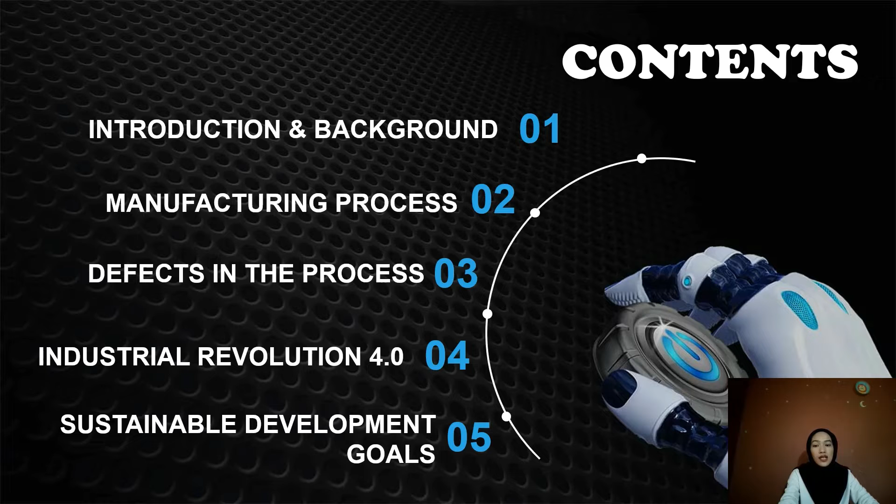This is the contents that we will going to present. As the presenter one, I will present the introduction and background of a famous manufacturing company.

It was the largest automobile manufacturer in the world for the first time in 2008, which is Toyota Motor Corporation. Originally, the company was founded by Sakichi Toyoda in 1926. Then the Toyota Motor Corporation was founded in August 1937 by Kiichiro Toyoda, the eldest son of Sakichi Toyoda. It becomes one of the largest automobile manufacturers in the industries, and now both companies are part of the Toyota Group.

I will share a little bit of history of Toyota Industries. It started in 1926 as Toyota Automatic Loom Works, founded by Sakichi Toyoda. He was the inventor of a series of manual and machine-powered looms, and was referred to as king of Japanese inventors due to his contributions to the industry.

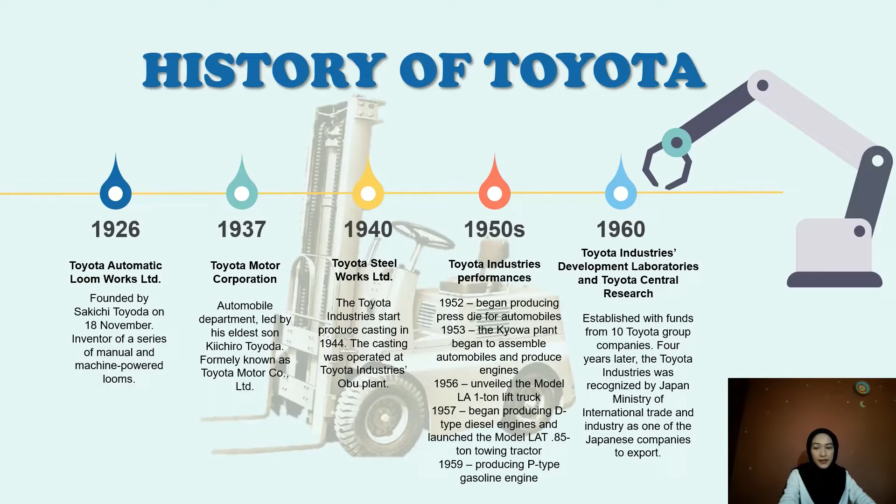In 1937, Kiichiro Toyoda decided to change focus from loom manufacturer into the automobile manufacturing. It is when the Toyota Motor Corporation was created. It was formerly known as Toyota Motor Co. Limited. Along the years, the manufacturing company has developed to many subsidiaries.

The company now produces more than 10 million vehicles per year. The headquarters of the manufacturing company is located at Toyota City in North Central Aichi Prefecture, Japan. Several of Toyota Motor Corporation manufacturing plants are located there too.

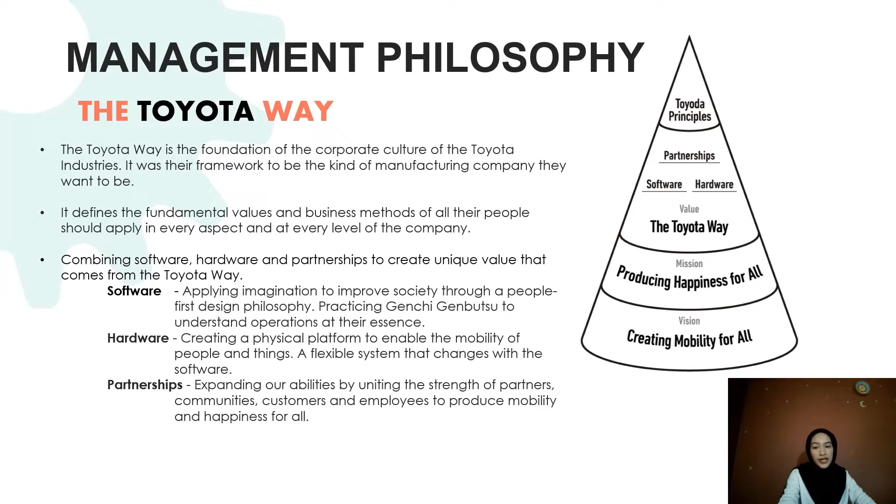The Toyota Industries has a management philosophy which is the Toyota Way. The Toyota Way is the foundation of the company to be the kind of company they want to be. It defines the fundamental values and business methods of all their people, including employers and workers, should apply in every aspect at every level of the company. The Toyota Way combines software, hardware, and partnerships.

So the Toyota industry used the lean manufacturing methods called the Toyota Production System. It is the holistic approach to efficiency, generating sustainable profits and satisfying the customer with the highest possible quality at the lowest cost in the shortest lead time.

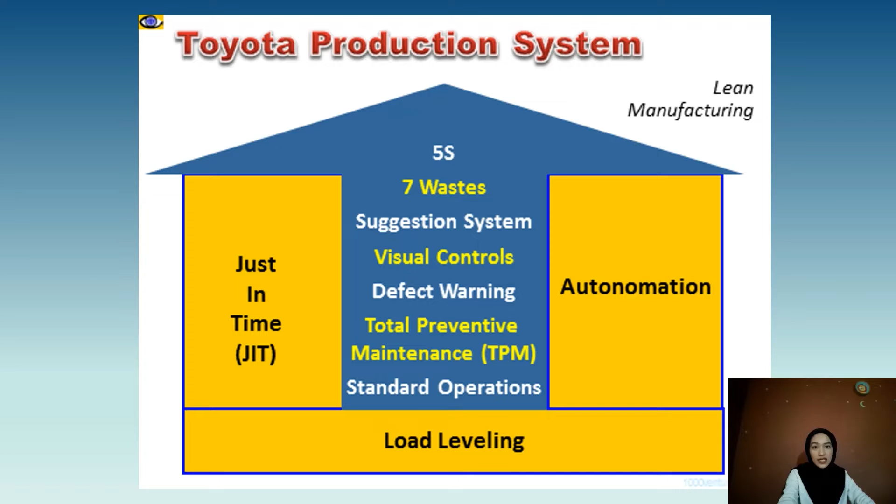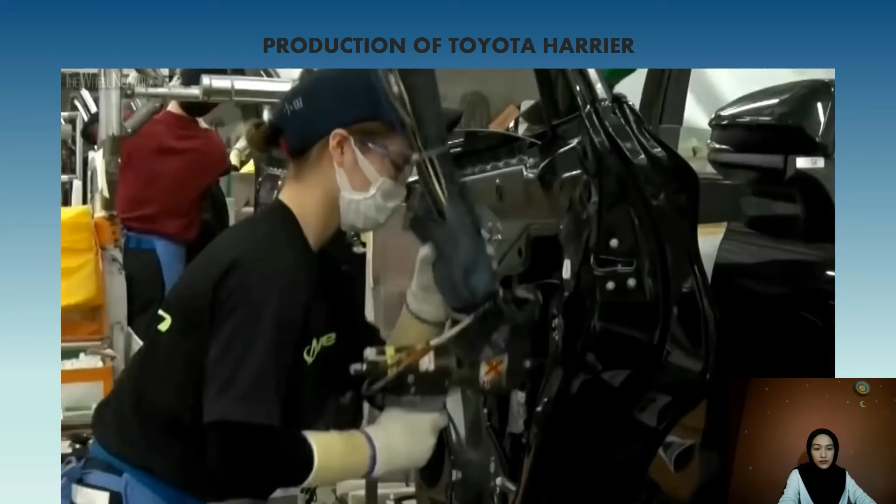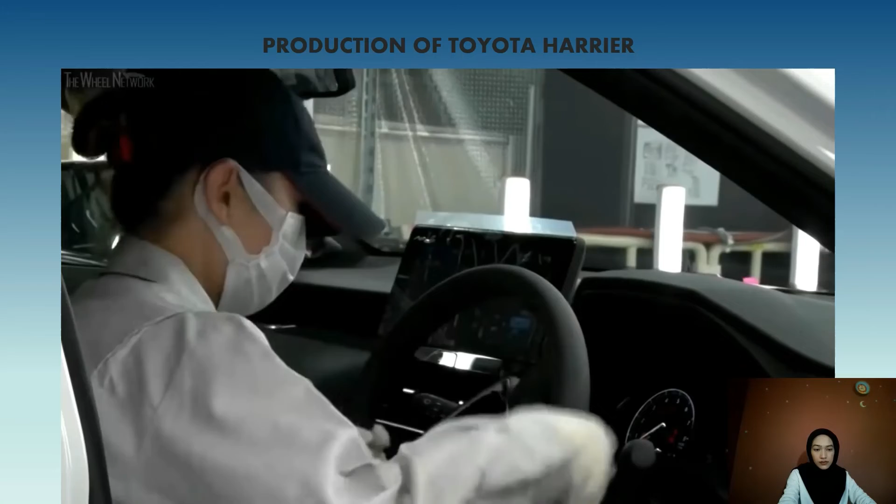So that's all from me. The next presenter will present the manufacturing process and technology applied in Toyota Industries.

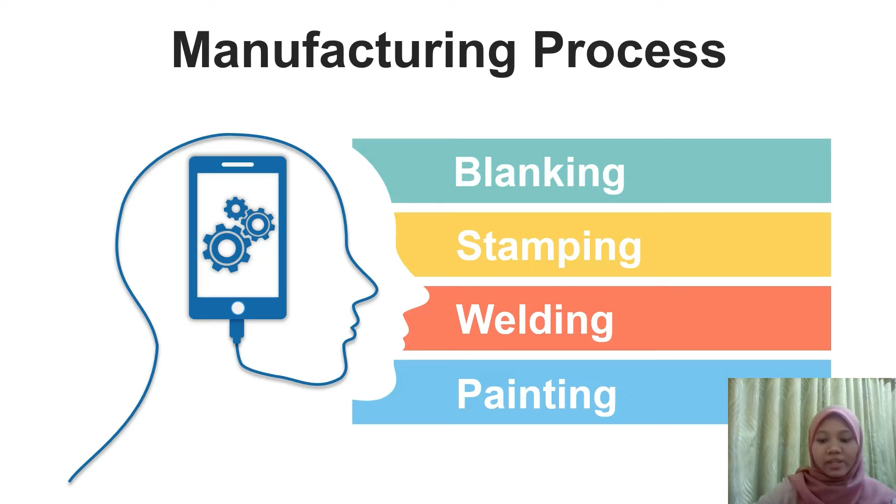In producing a car, Toyota has 8 major steps starting from blanking, stamping, welding, painting, injection molding, assembly, final inspection, and shipping. Therefore, let us analyze the process deeper.

The first step is blanking. Blanking is a process of cutting sheet metal into specific dimension and shape. The coil will be loaded into the blanking machine to be straightened and cleaned. The sheet metal then will be cut according to its dimension.

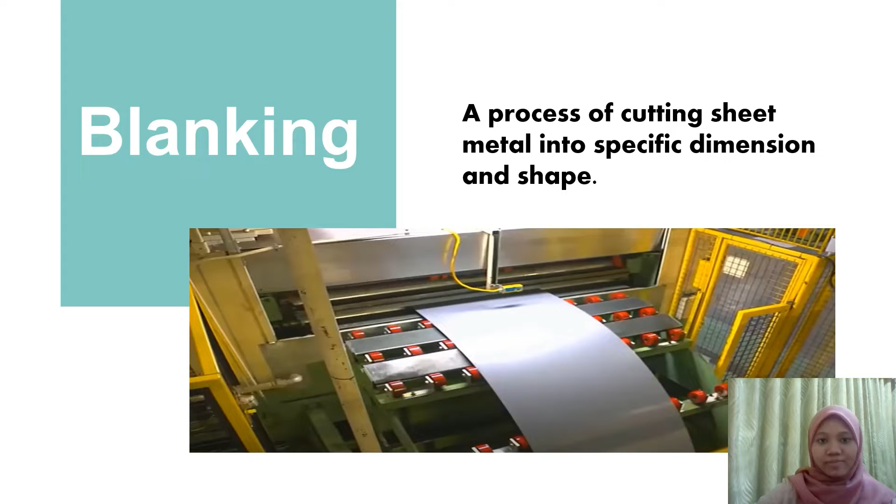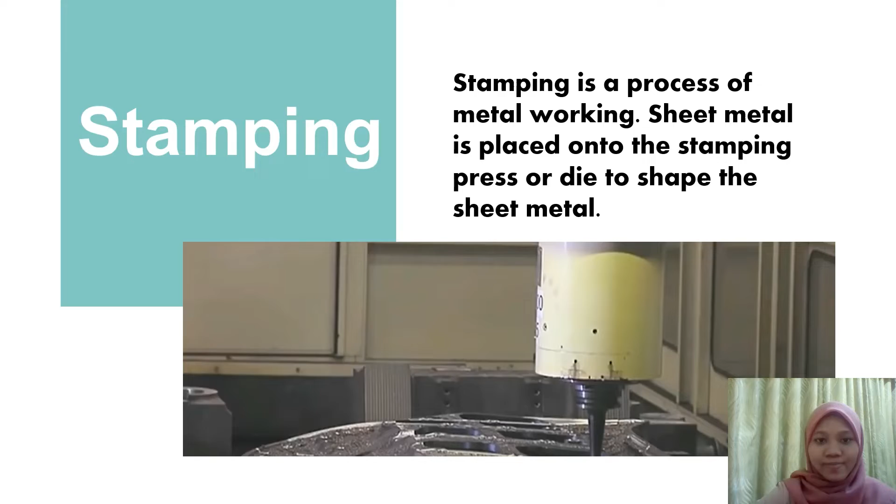After the sheet metal being stamped to desired shape, we will move to the third process, which is welding process. In welding process, the sheet metals of different parts will be joined using resistance spot welding. This welding process is conducted by automated robots as believed to be more precise and time-saving. This type of welding is suitable for assembling car body as the process is very fast and efficient for huge car production.

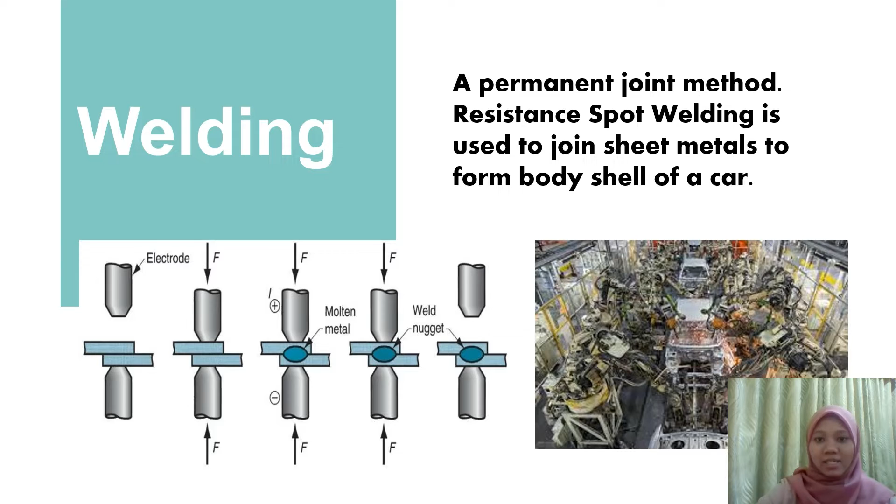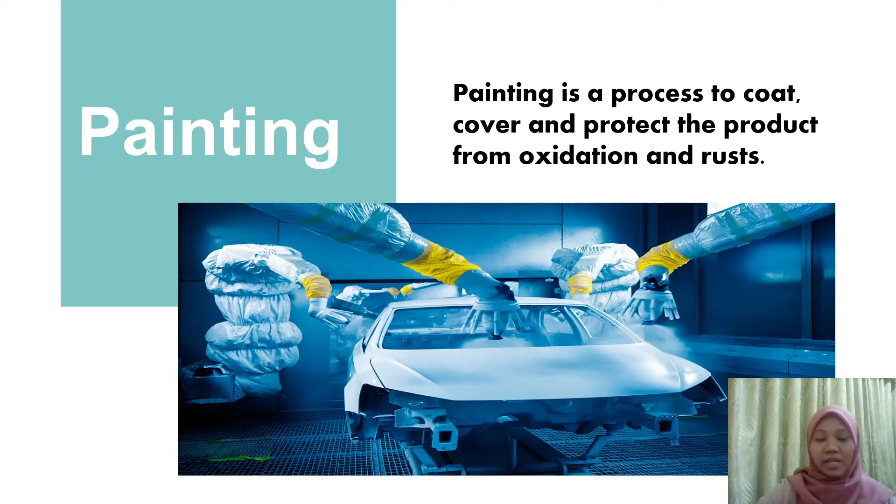The fourth step is very crucial, which is painting, as paint will not just coat and cover the car body with attractive colors to increase its aesthetic value, it also helps in protecting the car body from rust and oxidation. Toyota car painting process took 8 major steps, start from cleaning, baking, and coating in every precise manner.

The next process is injection molding. Injection molding is a process of injection of melted plastic pellets into a mold cavity which fills and solidifies to produce final product. Injection molding is needed to fabricate non-metal components of the car body, which are interior trim, rocker panels, front and rear bumpers, substrate, and also instrument panel. Injection molding is the most suitable technique to fabricate these parts, as it is possible to make complex and intricate shape. This process also economical for large production company like Toyota.

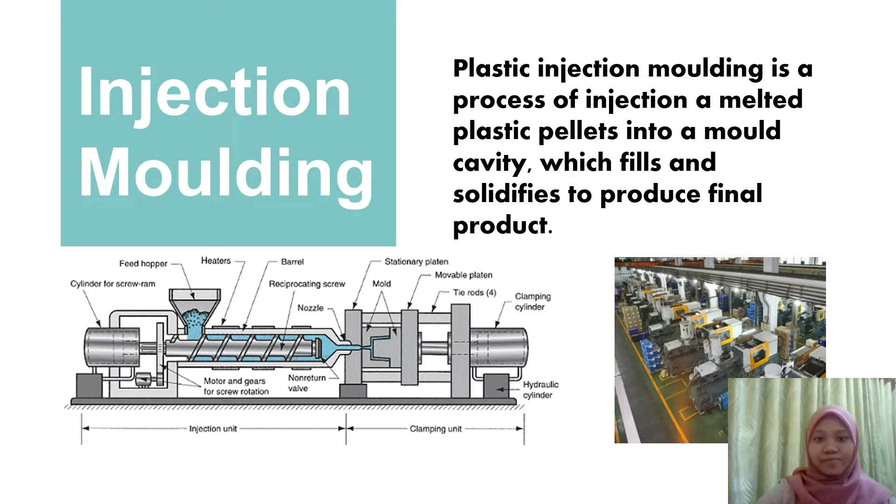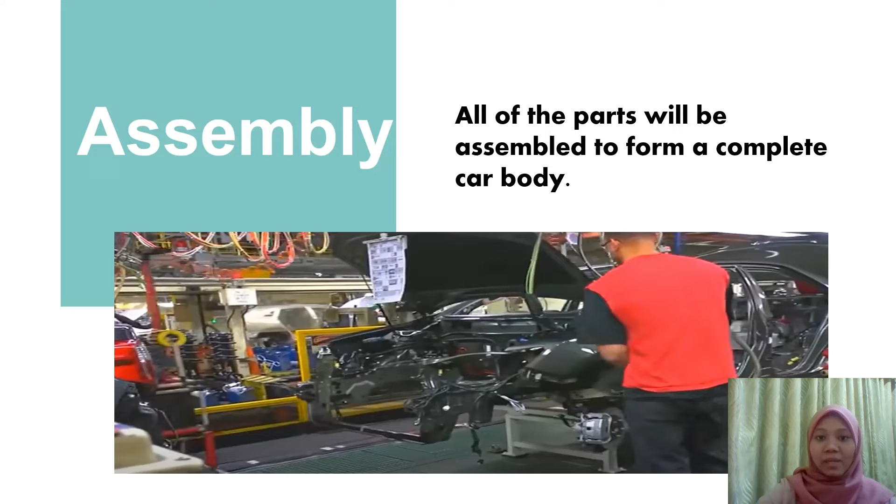After all parts are ready, all the interior and outer components will be assembled using bolts and nuts. The assembly process is made easier for the worker as the hoist will be used to hold and transfer the parts in assembly process. Some of the parts were assembled using ultrasonic welding instead of temporary joint.

As the car has completely assembled, final inspection will be done by inspectors to ensure the car can operate at its best condition before the car arrives at customer's hand.

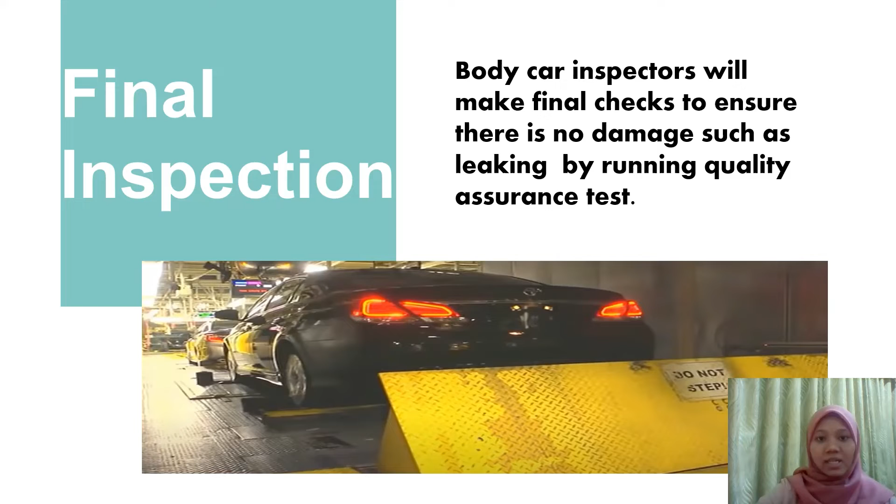The last process is shipping process. As inspectors had done with inspection, the cars will be transferred to Toyota dealers in order to provide customers with the high-quality automobile craftsmanship.

The second part of this presentation is technology applied in Toyota industry. Throughout this process, computer laser technology and automated robots are utilized to fabricate high-quality cars.

Two major principles, Poka-yoke and Jidoka, were applied to ensure all problems encountered during the fabrication process are addressed by stopping the manufacturing process once a problem arises. A cord is used by the workers to notify the leaders that there is a problem on specific parts of the production line. By the end of this presentation, we can see that Toyota utilized high-quality technologies to create the best craftsmanship in the automotive industry.

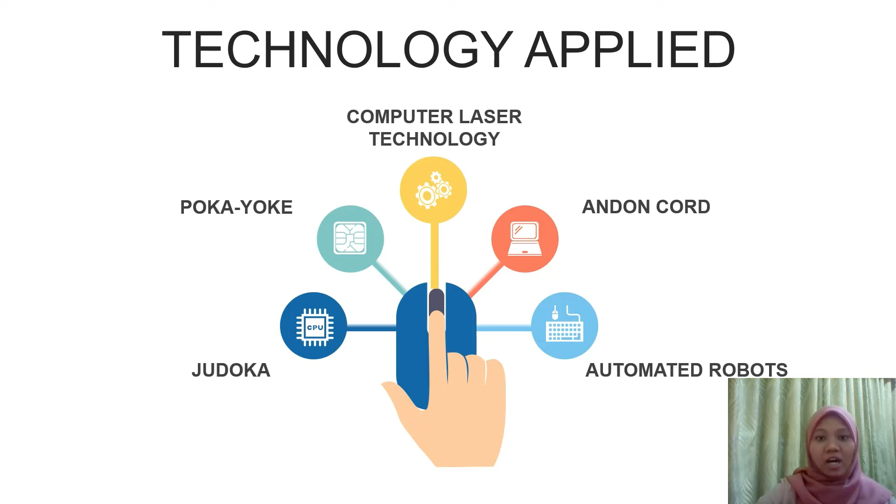That's all from me. Thank you.

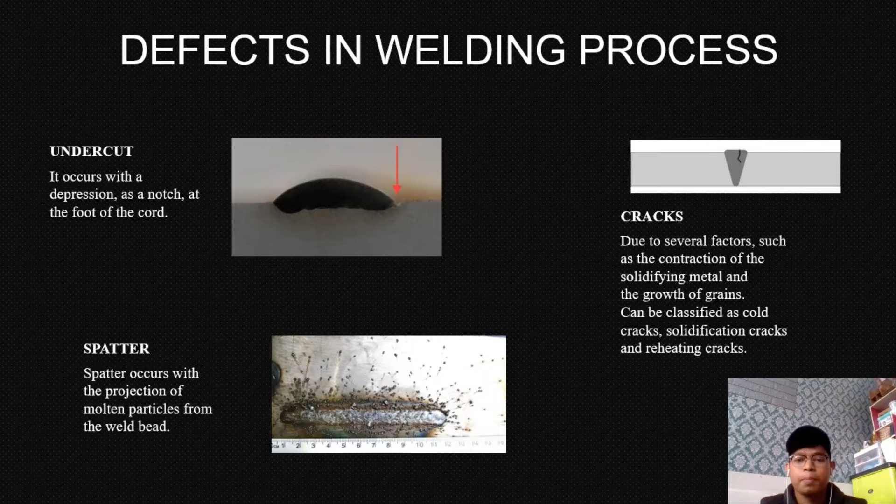For the defect in the injection molding process, we can see the vacuum void, an air pocket trapped in the injection molding product below the closed surface, as shown in the figure above.

The second defect is weld lines. Weld lines occur when two different flows meet each other during the injection molding process, giving a line that looks like an incomplete molding process.

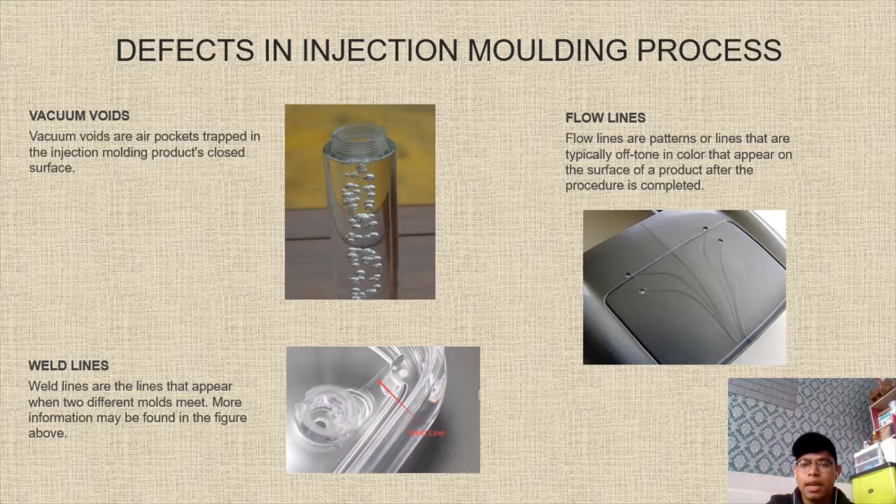The next defect is flow lines. Flow lines are patterns or lines, typically off-tone in color, that appear on the surface of the product after the procedure is complete. This gives lines on the product that make it look cheap.

The defects in the painting process are four: grinning, chalking, running, and sagging. Grinning is the visibility of the background due to insufficient opacity of the paint film even after the final coat, so we can see the original color of the body even after finishing the painting process.

The next is chalking, which is the formation of powder on the painted surface. When we touch the surface after finishing the painting process, we can see powder on our hand from that surface.

The next is running, which means a thin layer of paint moves downward on the smooth surface. At the end, we can see a small area of paint assembled at the lower part.

The next is sagging. Sagging is similar to running, but the difference is that in sagging, a thick layer of paint film runs downward, so it's similar to running.

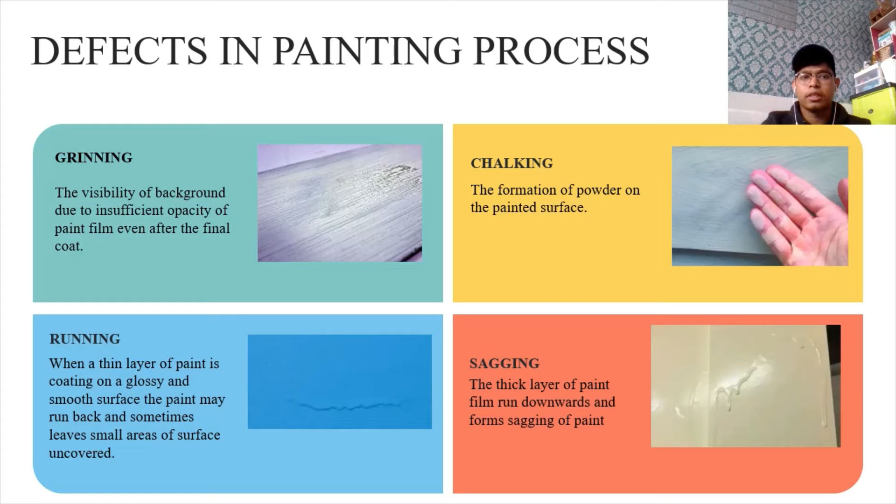For the quality issue in this process, after some research, I found that most Toyota users complain about their dashboard melting. This happens when they park their car outside, and during hot weather, the sun directly hits the dashboard and makes it melt.

Other than that, I found they complain that their car body fades after several times of use, even during rainy days or hot weather. After using the car for some time, the paint on the body starts to fade. This can be solved by repainting and applying wax or coating on the body to make the paint last longer.

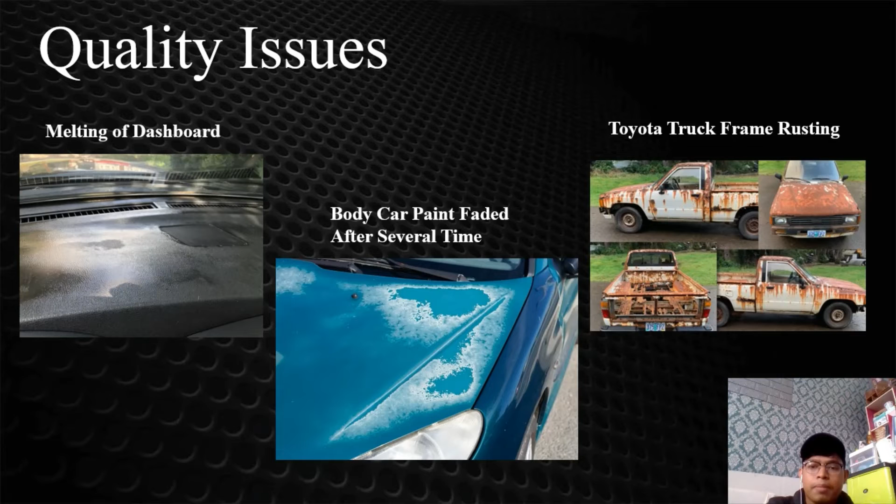The next issue is Toyota truck frame rusting. Since the truck is used every day to go anywhere, even in hot or rainy weather, the extreme weather in this country may cause the frame to rust and not last long.

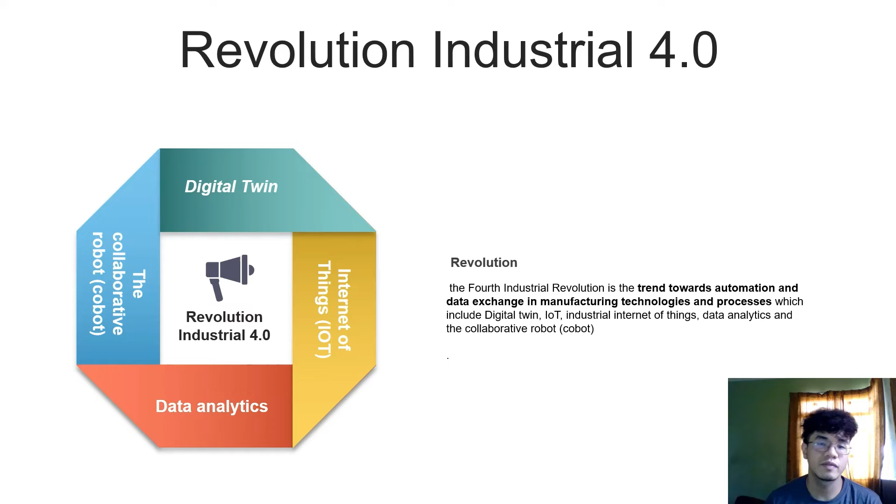For the fourth industrial revolution, it is the trend towards automation and data exchange in manufacturing technologies and processes, which includes digital twin, IoT (Industrial Internet of Things), data analytics, and collaborative robots. So as we can see, there are four points here: digital twin, Internet of Things, data analytics, and collaborative robots.

For the first point in the industrial revolution, it is the Internet of Things. IoT is quite important in Industrial Revolution 4.0 for road safety or to avoid accidents, because there are technologies connected to make driving safer.

For example, interconnected sensors, cameras, and intelligent features make up the latest Toyota vision. This technology makes driving safer, easier, more economic, and more enjoyable. For example, in 2020, the Toyota Yaris Cross was the first new car to launch with Toyota Connected Services, which enables various features.

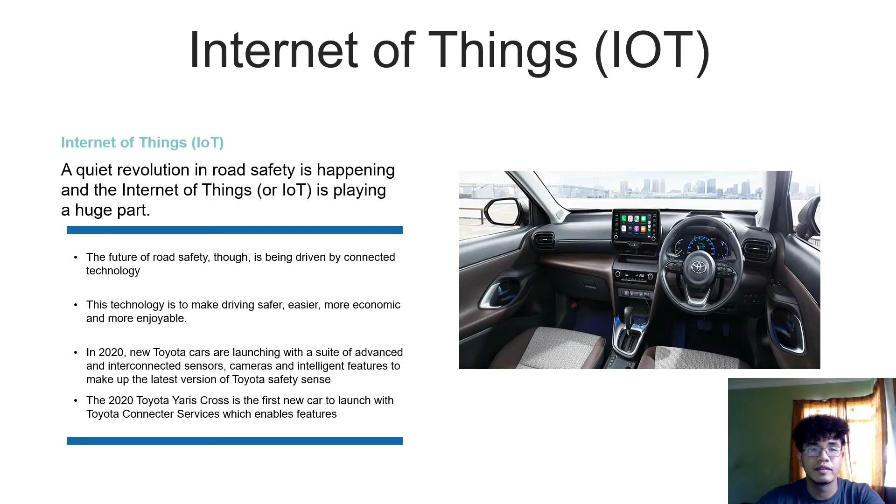For my second point is data analytics. Data analytics means there are some data put in the car so that they process how the car is used, using the data information. Toyota gathers your vehicle's location, health, and driving information to provide connected vehicle services.

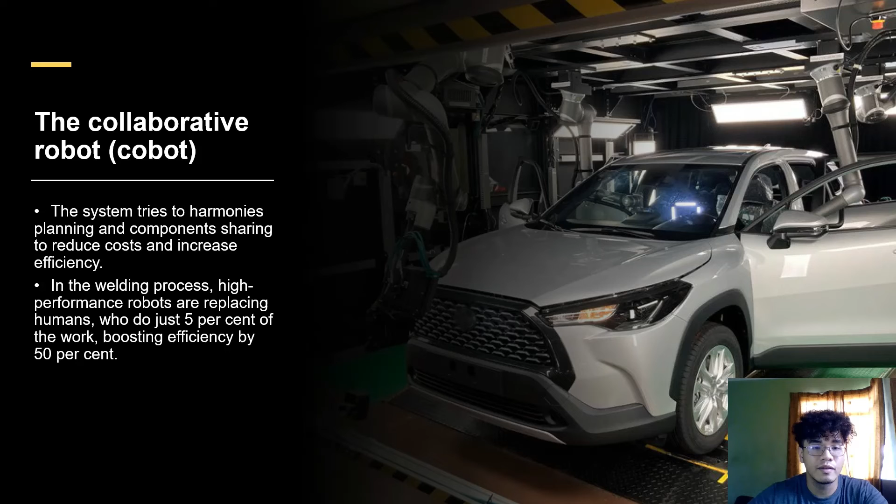Toyota's company collaborates with robots to make cars so they increase the efficiency of work and reduce cost. There are many processes such as welding, where high performance robots are replacing humans. Just 5% of the work is done by humans, and the work boosts efficiency by 50% using robots.

Next, the last point is digital twin. Digital twin of the car means the visual imitation of the whole car, displayed on a tab in the interior of the car, showing the programming, mechanics, electrics, and actual conduct of the vehicle. For example, the sensor of the car - when we reverse, we can know the distance we should stop to avoid collision.

Another example is inspection information, as well as service history, design changes, parts substitution, and warranty information.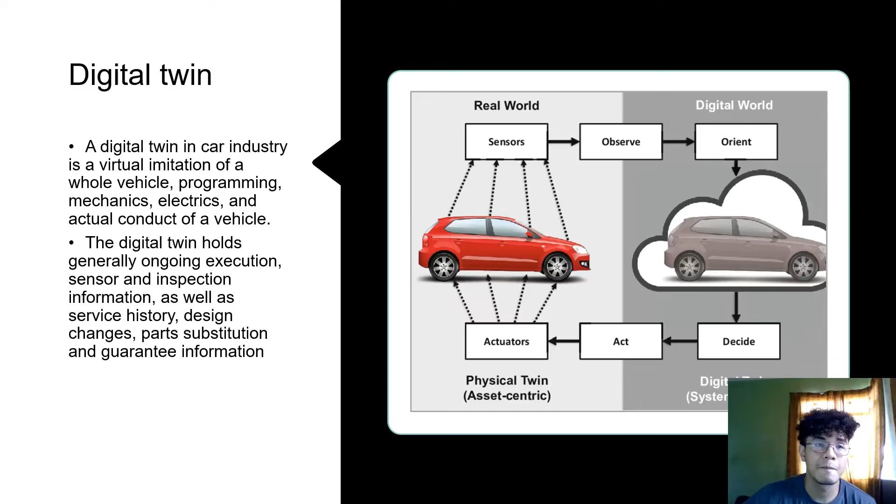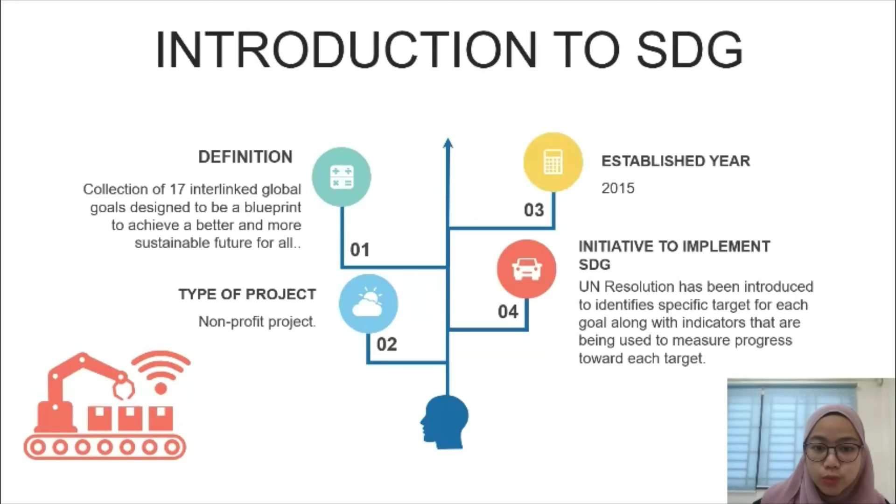First SDG achieved by Toyota is Good Health and Well-being. They achieved this by doing research and development of automated driving technology, developed under the Mobility Teammate Concept. The elements input into this technology include high-precision maps and image data from drive recorders.

Next SDG is Quality Education, where Toyota has formed the Toyota Female Engineer Development Foundation, aiming to foster and support women in the field of manufacturing in Japan, targeting high school students and female university students.

The other SDG is Gender Equality, where they introduce diversity and inclusion. Toyota aims to create an attractive workplace where employees with wide-ranging skills and values, irrespective of gender, age, and nationality, can demonstrate their ability to the fullest and achieve self-realization.

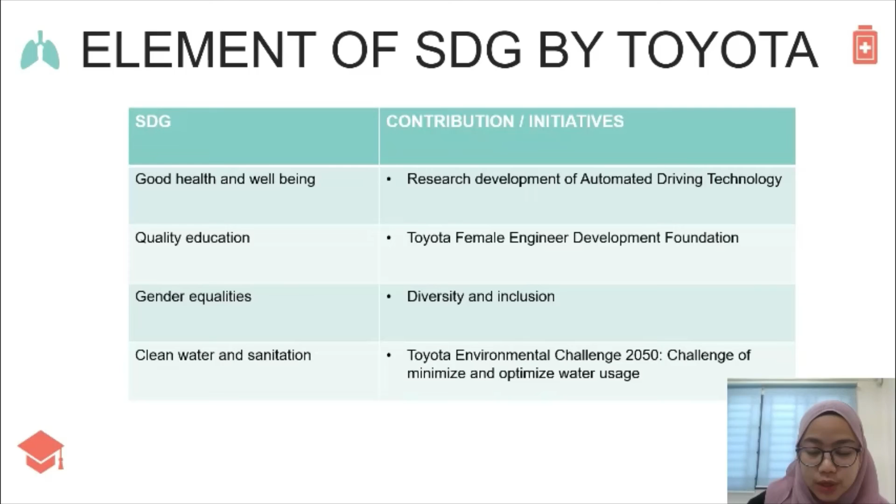Next SDG achieved by this big company is SDG 6, Clean Water and Sanitation. In order to achieve this, Toyota has conducted a challenge to minimize water usage and implement water discharge management.

In order to fulfill SDG 7, Affordable and Clean Energy, Toyota has conducted the Plant Zero Carbon Dioxide Emission Challenge. Toyota has selected 5 sustainable plants worldwide to serve as industry-leading prototypes for clean and green production. The steps introduced by Toyota to complete this challenge include using renewable energy and implementing innovative technology to reduce waste.

The other SDG is Industry, Innovation and Infrastructure, where Toyota has developed a humanoid robot capable of flexible movement that mirrors the actions of its remote human operator.

Apart from developing many technologies to fulfill SDGs, Toyota is also concerned with respect for human rights, suitable with SDG 10, Reduced Inequality. Toyota utilizes the Toyota Suppliers CSR Guideline, which specifically states that Toyota respects human rights and expects its supplier network to also have this perspective.

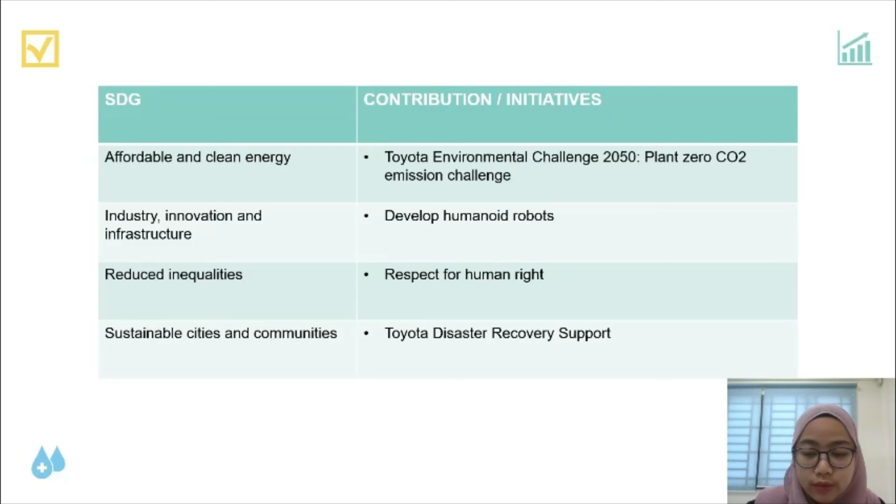For SDG 11, Sustainable City and Community, Toyota Disaster Recovery Support has been introduced, aiming to utilize its resources and know-how effectively to provide support meeting the real needs of disaster victims.